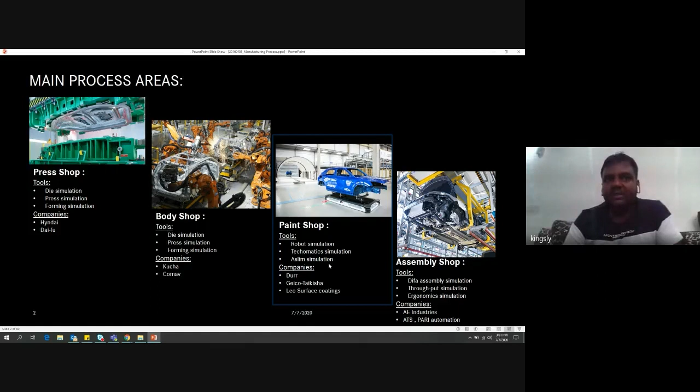So today we will focus more on paint shop. In paint shop we will do the robotic simulation, and also the Tecnomatix simulation, which is nothing but a throughput simulation. Then we'll also do the ASLIM simulation, for the paint properties, like how much thickness we have to give in each part. This kind of simulation we'll do in ASLIM.

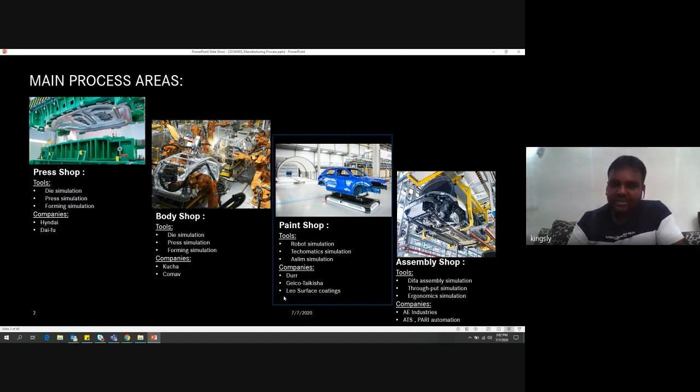So there are 3 major companies in the globe which build the complete paint shop facility for all the OEMs. One is Dürr, this is a German company. Another one is Geico Taikisha, this is an Italian company. Also, there are some other companies. One of them is Leo Surface Coatings, which is an Indian-based company. They also deliver paint shop turnkey projects.

So apart from the main process, there are some auxiliary processes which support the manufacturing process in automobile. The first one is HR admin, sourcing, from the supplier side and how to do the procurement. Then we also have building construction, because we need a building for this facility. Also facilities, then utilities, then logistics for material handling.

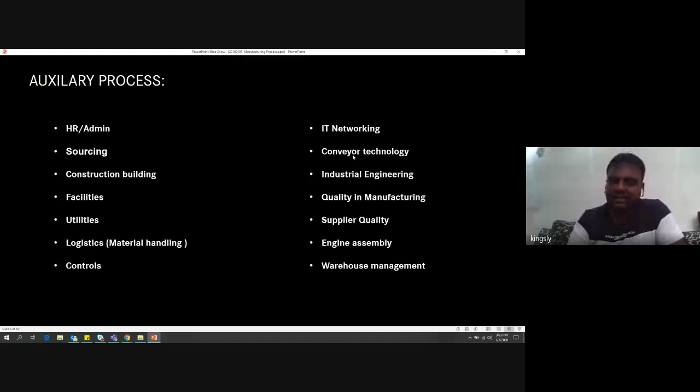Also we'll have a controls department where we collect all the data in one place and trigger where the material has to go into the next step. So controls is also an important auxiliary function. Then we need IT networking. Also we have conveyor technology, which helps move the car from one place to the next process.

Also industrial engineering, then quality in manufacturing, supplier quality. In parallel, we have engine assembly and warehouse management. So these are all the main auxiliary processes which support the main process area. So as we said, today we will discuss more about paint.

So you see cars in different colors on the road. You may have thought about how much the thickness of the paint will be. So before going into the thickness on the car, I will give some examples. Human hair is 50 microns thick, so whenever we talk about thickness, you can easily compare which thickness we are talking about. Then a dust particle is around 10 microns. Cotton fiber will be 20 microns. A smoke particle is 1 micron. So you can compare with a human hair for your assumption.

So whenever we receive the material from the press shop, that material is steel, aluminum or magnesium, depending on the process requirement. This material always comes coated with a zinc layer, because it comes from different places. For corrosion protection, all this material is coated with a zinc layer or coil coat, which will be 4 to 9 microns. So when the car comes into the paint shop, it is already pre-coated with 4 to 9 microns.

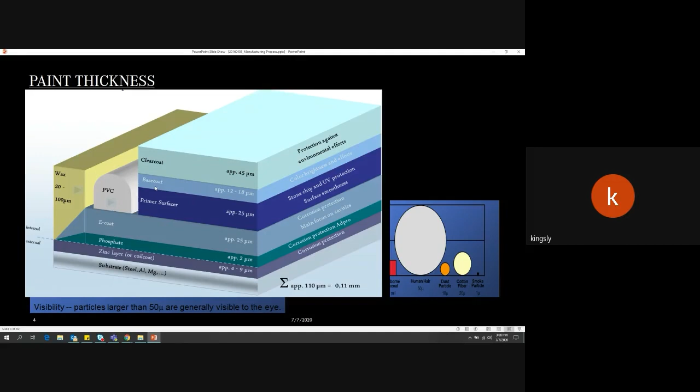Base coat, as I told before, will give the color of the car. For example, if you need a green color car, you will not see it until the primer. The first color will be applied in the base coat. This will decide which color the customer wants. Also, it will give the effects for the car body.

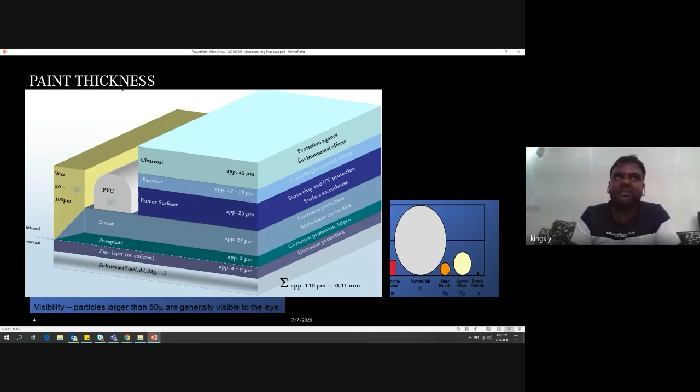Clear coat is protection against environmental effects, which is nothing but a glassy finish. Also, fingerprint protection: if somebody touches the car, you will not see the fingerprint on the car body. So it is for the environmental effects. So this is the paint side.

Also, we do the PVC application. PVC is nothing but polyvinyl chloride. We will see it in detail in the slides below. Also, we do the waxing application.

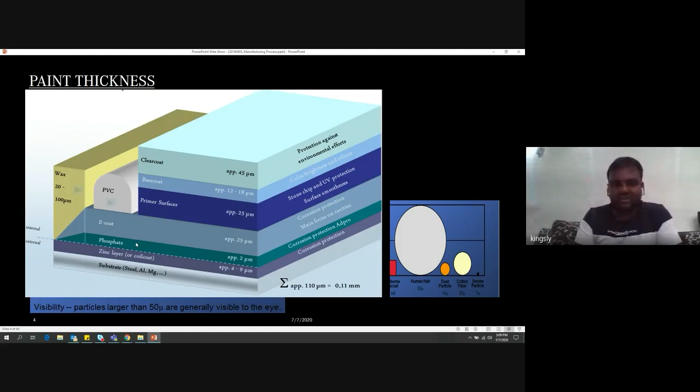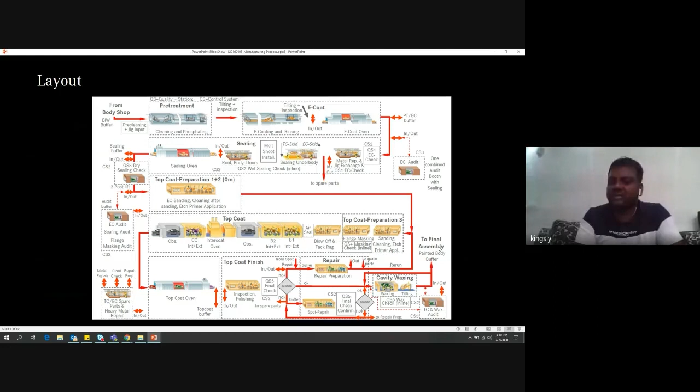After sealing, it will go to the top coat application. After top coat, if there is any repair, then it will go to the repair process. Otherwise, it will go to the cavity waxing process. Then it will go to final assembly to assemble the interior and exterior parts.

So first we will talk about the phosphate coating. What is the phosphate coating? How do we do the process of phosphate coating? For phosphate coating, first we have to clean the complete car body, which is coming from the body shop. Because in the body shop, we may store the cars a little longer, and the bare material should not get corrosion.

Also, to avoid this corrosion, sometimes we apply oil on the car body. So when we come to painting, there should be an oil-free surface. Only then will the paint quality be good. For that, first we need to clean the complete car body. After the cleaning, we have to do the rinsing with activation. Then we do the phosphate coating.

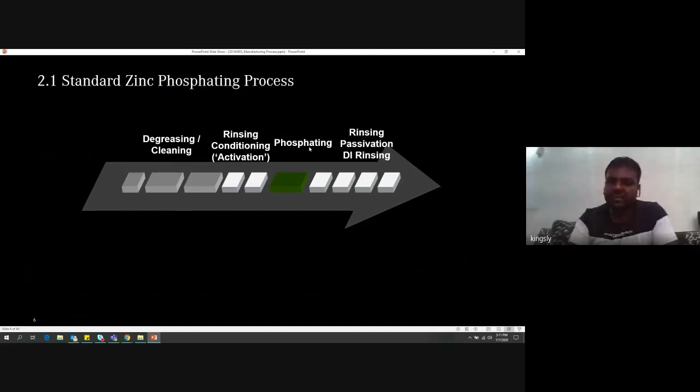After the phosphate coating also, we do the rinsing, because phosphating is nothing but a chemical cleaning process. If the material stays more than the required process time in this phosphate chemical, then the chemical starts etching the metal, which is not good for the e-coat process. That's why after phosphating, we do the rinsing.

So how do we check the surface is cleaned for the e-coat, meaning whether the phosphating is done completely clean or not? If you put water on the surface and there is oil, then the water flows like this. So the cleaning of the car body is not done properly. But when the cleaning is done, we will have a smooth surface.

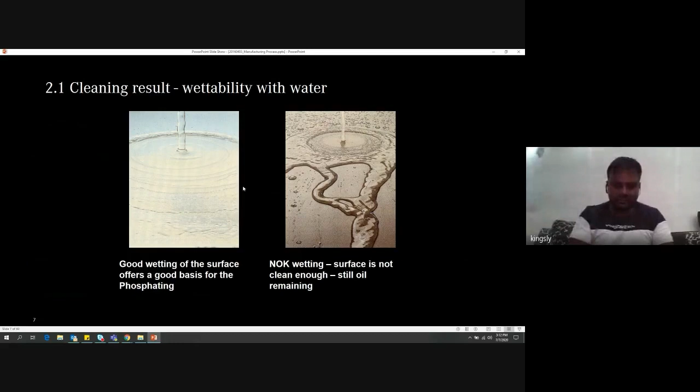So we have a separate laboratory in the factory where we can analyze how much chemical is required for cleaning and what kind of process time we need for this cleaning. Then finally, we should achieve this kind of smooth surface.

So if you check the cleaning of the car body with a microscope, we need to get this kind of activation surface, because this will help the next e-coat, nothing but the primer coat process. If you see these kinds of crystals, then the cleaning or conditioning activity is not done properly.

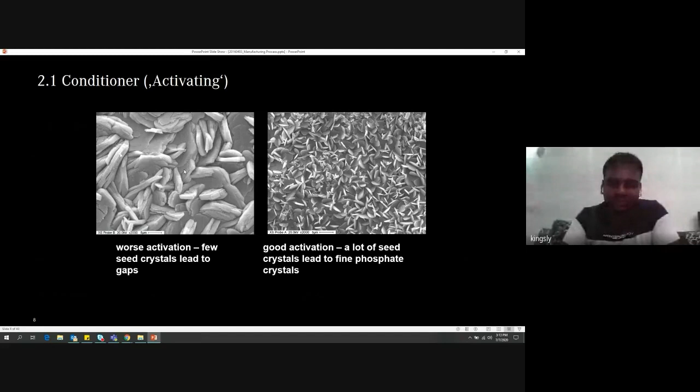For the phosphate tank, basically we use phosphoric acid, then zinc, nickel, manganese, iron, and calcium. Also, phosphate, nitrate, sulfate, and chloride anions. Then for the accelerator, we use NaNO2 and H2O2. So these are all the basic chemicals used for the phosphate coat.

So as I said before, this phosphate coating is 2 microns for the car body, and a human hair is 50 microns. So you can compare how much thickness we are adding to the car body.

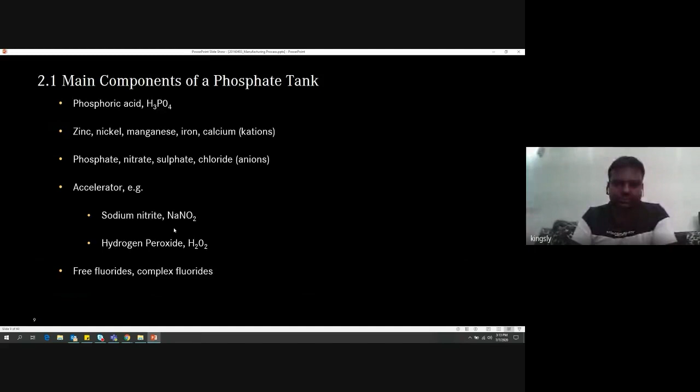So the first one which we spoke about is the phosphate coating. To do this coating, we have some process time. If you see the pictures, when we dip the car body into the process, at 2 seconds it shows this kind of crystal. Then after 15 seconds, this kind of crystal. After 90 seconds. So at 150 seconds, we will achieve the required surface for the e-coat. So the total process time for this process is 150 seconds.

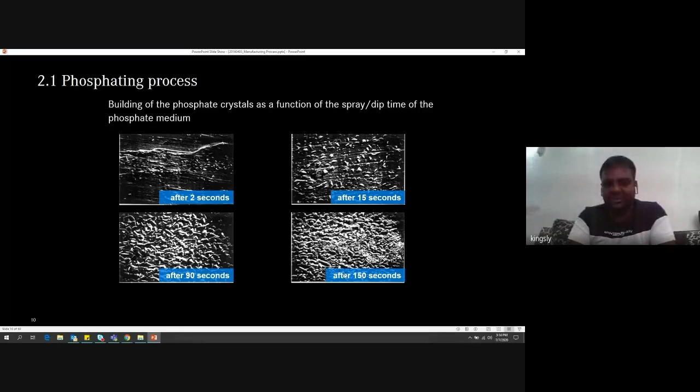The next coating is E-coat. E-coat is the primer. The first primer we will apply on the car body and the cavities. So this is the dip process. If you see the picture, the paint will be in the big tank. Then we will dip the complete car body. So why are we doing this E-coat? E-coat is nothing but an electro coat. First, for corrosion protection, then for inner and outer edge corrosion protection, we do this kind of E-coat.

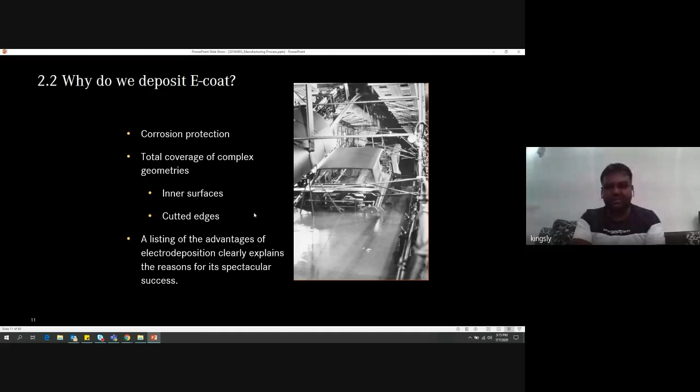So how is the process? The basic science. The E-coat is nothing but a cathodic electrode process where we keep the car body in the plus terminal. Then we have to give the voltage for the paint in the negative terminal. So how will we give this voltage? If you see the next picture, the paint will have the anode cells. Anode cells are the electrochargeable cells which will create a 24 volt negative voltage.

So this is the tank. The tank will be grounded. Then the tank will be filled with E-coat paint. For electroshock purposes, this tank will be coated with fiber so that there will not be any electrical energy transfer from the paint to the outside surface of the tank. So this fiber coating will act as insulation. There will be a full amount of paint in the tank. This paint will be charged with one rectifier. The rectifier will give the voltage, which I told you, 24 volts for the paint.

Then we have a car body. The car body is the metal car body. It's always steel parts where we can do the coating in the E-coat. So this car body will get the positive supply, or vice versa. We can also have the car body be the negative supply and the paint be the positive supply. This depends on the rectifier. We can give this voltage to the car body. So when this car body gets voltage, the paint already has the negative voltage, which we call the anode. Then by the electrocathodic method, all the paint will go and deposit on the car body surface.

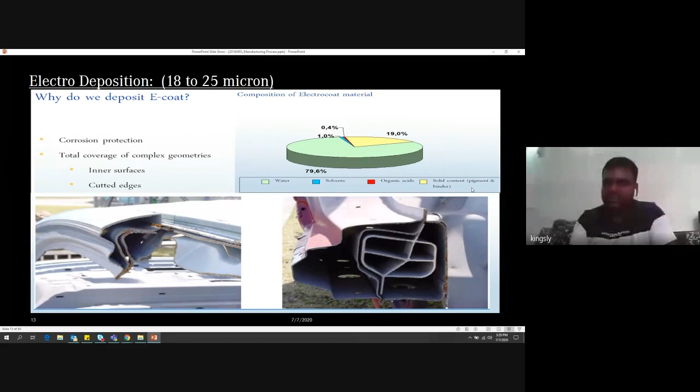Then we have to look at how many seconds we have to keep the car body in the process. But ideally in automobile industries, we'll keep 240 seconds. Then voltage will vary depending upon the production jobs per hour output. If they need more cars in 1 hour, then they keep less time, more voltage, or vice versa.

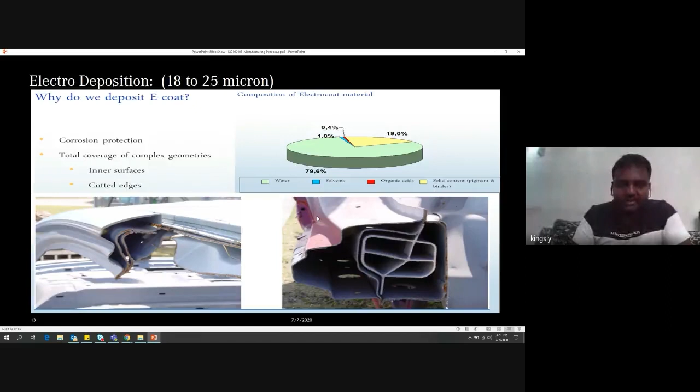Then another important topic for the e-coat process, because whenever we dip the car, there will be air bubbles in the cavities, because we always dip with some angle. I'll just jump to the first picture. You can see we always put the car in some angle. So this angle will be 18 degrees or 30 degrees or 45 degrees. Depending on the length of the tank and the conveyor speed, we can define this angle.

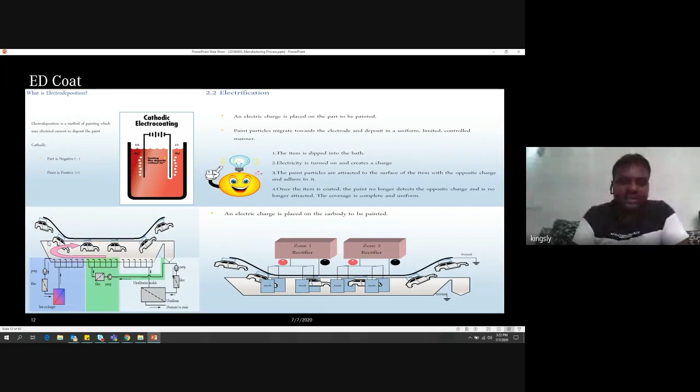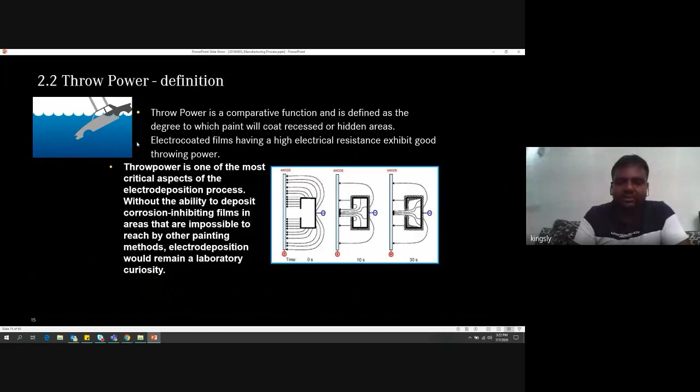So whenever we dip, there will be air bubbles. The air will move inside the cavities. Then if there is air, the liquid paint will not enter. So for that, we have to do some rinsing in the process. So how do we do the rinsing? We have nozzles in the bottom of the tanks. Then we'll give the throw power. By this throw power, we can push the air a little bit. There are also holes available, which we call drain holes. By these drain holes, the air will go out. Then the complete car body will be coated.

So how do we check this throw power? Because we want to know, okay, this is the car body, how much power we have to give, how much circulation we do. Because I also told you that in the e-coat tank we need a laminar flow. So if you give the complete circulation, it will transfer into turbulence, which will not be good for the exterior of the car body.

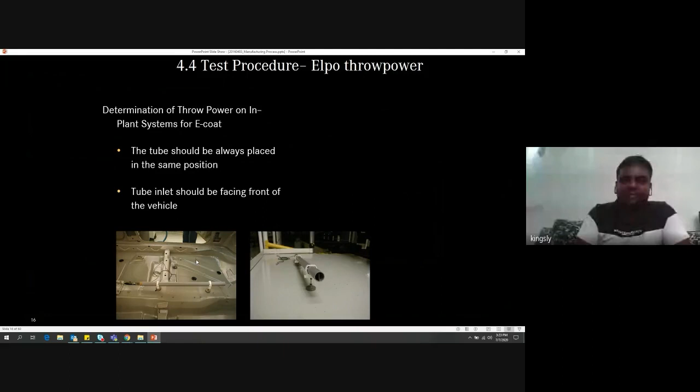So we have a test center. In the test center, we will prepare a pipe. Then we will check how much volume is needed, how much force we have to apply to help the paint achieve this throw power. Then these are all some test methods. For example, when we put 1 bar pressure, how much throw power we are achieving, and by this, how much coating we are getting, so how many microns in thickness.

So basically, this is like a complete car body. We make a sheet of 100 millimeter or 1 meter square. Then we'll put this plate into the tank. Then we will give the circulation and voltage. We will check how many microns we are achieving. For example, here we are achieving 20 micron, in the middle of the plate 19, then the edge of the plate will be 20 micron. So more or less we know it is within tolerance, because for e-coat we need 18 to 20 micron, 20 to 25 micron, so this throw power is okay.

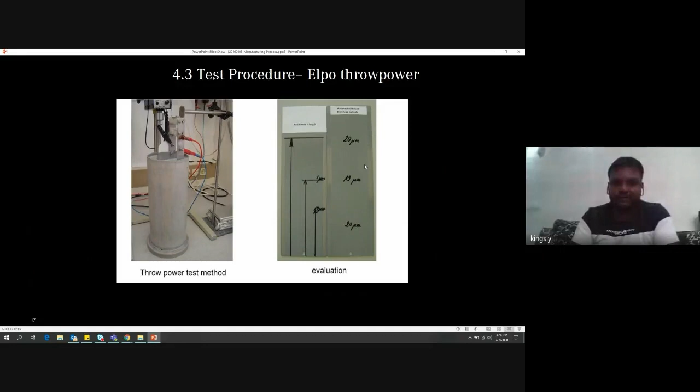Next one is how do we do dosing of this paint? How will we get this e-coat paint? So we will get the paint in two categories. One is the binder, then the pigment. Pigment is nothing but a color, and binder is nothing but a paste which will give the adhesive properties for the paint. Then these two will be mixed with DI water. By circulation, this binder will be mixed with pigment in a uniform way, so that if you dip the car body, when it is coming out, you will see equivalent paint distribution in all the areas.

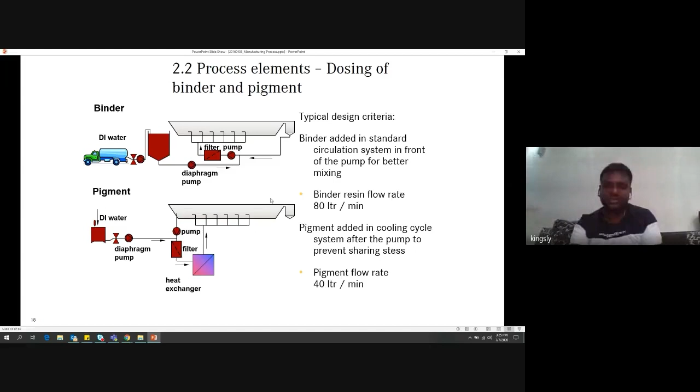The next process for painting is the oven. Whenever you do the painting, any coat, say e-coat or base coat, primer coat, we have to send this car into the oven. So what is the oven? The oven is nothing but a heat chamber, because each paint material depends upon the paint manufacturer's recommendation. Whenever we do the painting, we have to do the polymerization. Why do we have to do polymerization? Because we need around minimum 10 years of life for this paint.

Some OEMs give 30 years, some OEMs give 10 years guarantee for paint corrosion, some OEMs give 3 years. So based on their company policy, they also choose the paint. For example, if they are going with a lower value car model or some commercial model, then they give 3 years of paint corrosion protection for the car. Then they may use low cost paint because it has to withstand 3 years. If you go with a luxury car model, they give 30 years validity. Meaning for 30 years, if there is any corrosion, they will get the guarantee for that corrosion protection.

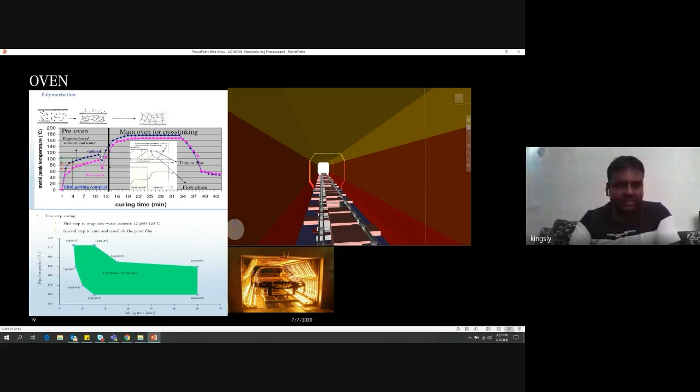So for this, we have to heat up this paint first for 10 minutes at 110 degrees Celsius. Then we have to heat it again from 110 to 180 degrees Celsius. At 180 degrees Celsius, we keep it for 28 minutes in the heat oven. Then we cool down to normal temperature, below 40 degrees. When we do this process, the paint gets polymerized. Polymerized means the crystal is broken for the paint, as you can see here. This gives good adhesion between the metal or steel and the paint material.

One comparison: if you do painting for a house, if the surface is not good, it will come out maybe after 6 months. But house painting uses different material, different process. For automobile, this is very precious because all the material is steel, most of the material is steel. So we have to do proper painting, because painting only will represent the car quality, like shining, and attract the customer. So for E-coat, we have to follow this polymerization.

So whenever we do the polymerization, we also have a quality check. We will check how much the temperature is for the car body. We will not check each car, maybe per shift we will check 1 or 2 cars. Then we will check if the oven is at the correct temperature.

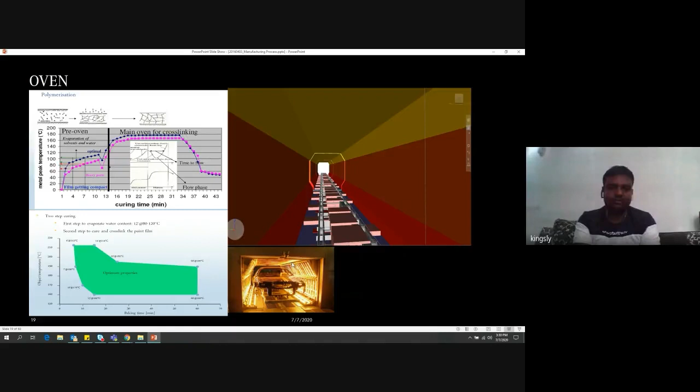Then we have the recirculated air roof center inside. This is the inside of the roof where it is not easy to reach. So we place heat sensors in all these areas, and we run this car body through the complete oven. After the car comes out, this sensor will also have the Datapaq, which is a device that monitors the temperature of the car body as well as the time. So after it comes out, we download and check if the car body paint polymerization is done properly or not. By this, we check the quality of the oven process.

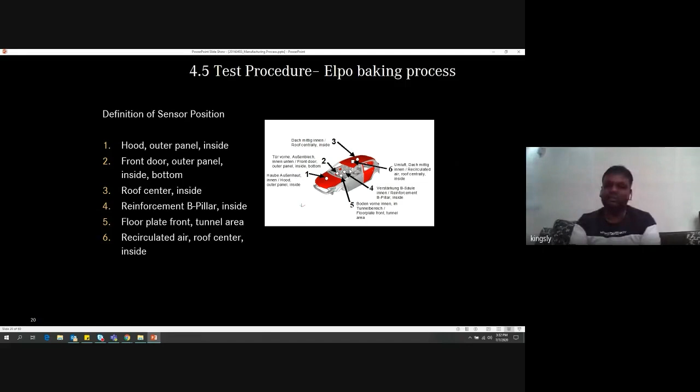So till now we learned what is phosphating for the cleaning of the car body. Then E-coat is the first primer painting. Then for this E-coat, we have to do the polymerization.

Next, we'll go to the test method. One test we saw is how much temperature we gave to the car body, and how the graph looks. By this we can check.

Another test is the adhesion test. If you see this tool, we call it the cross hatch line tool. With this tool, we make a scratch on the car body. If after scratching you can see only the line, then the paint is okay. But if the scratch comes out blurred, meaning it's also removing some surface apart from this tool edge area, then we identify that the coating is not okay, meaning the paint and the steel are not bonded well, not polymerized well.

Then we will go into the test process again with the laboratory. We will check the property of the paint, then the polymerization movement. Also we check the voltage of the car body, which was given during the e-coat process.

Finally, we have to prove and pass this adhesion test. Otherwise the quality of the paint is not okay for the car body.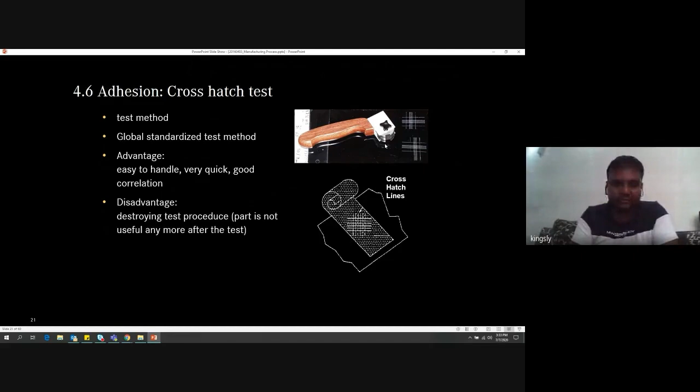So why do we do the sealing? As I told you before, from the press shop we get each part in segments, like the underbody separate, the door separate, the hood separate - everything is separate. In body shop, we do the welding.

In body shop we will not do continuous welding, because when we do continuous welding, this sheet metal gets destroyed - the maximum thickness is 1.2 millimeter and the minimum thickness is 0.6 millimeter. When you do continuous welding for 0.6 millimeter, the shape will change and we won't get the car shape. Also it is a difficult and time consuming process.

So for that, what we do in body shop is stitch welding with particular intervals based on simulation. Then in sealer, we apply a complete sealing material. Sealing material is called polyvinyl chloride material, and this is sealed in all the joints for the car body.

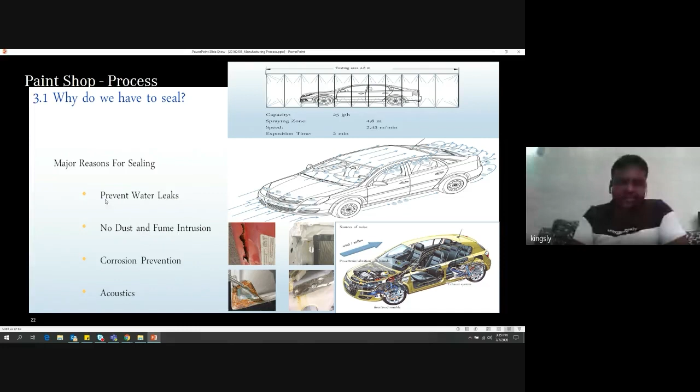Also, if water comes in, it starts to cause corrosion. Basically, we do this entire paint shop process to avoid corrosion. So this painting and sealing is all for corrosion resistance. We have to prevent water leaks - that's why we are doing this sealing.

Then the second reason is no dust and fume intrusion. When you drive outside, we also have the engine compartment, so there should not be any dust or fume coming inside, which would not be comfortable for the passenger. Also, as I said, it's for corrosion prevention. Also, the sealing helps with acoustics.

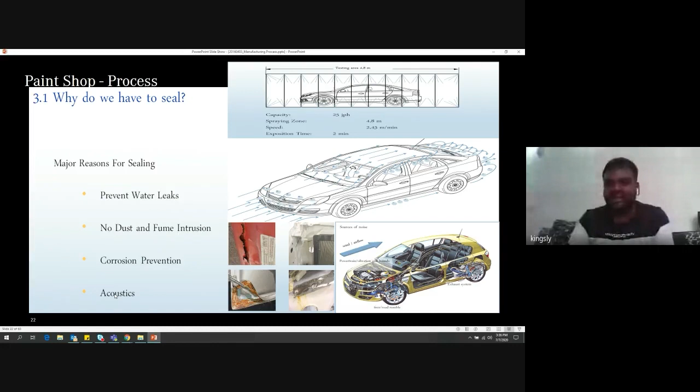Because whenever we prepare a car, we also do the aerodynamic simulation. For that, we assume this is one body - it is not like separate sections where you have a gap where air can access. So this also helps.

If you see this picture, the corrosion - if you don't do the sealing, after 6 months it starts to corrode like this. Then because of the corrosion, the joints also come out. It also helps for the airflow where we can drive the car faster.

Then how do we test the sealing process? What we do after the sealing and after assembly is keep the car in the shower tester. Shower tester is nothing but a spray of water where we keep the car.

We run this car for 4.8 meters at 2.45 meters per minute. Then the time for exposure is 2 minutes. When it comes out, we check inside the car if there is any leakage or not.

So by this, we will ensure that the sealing process is okay.

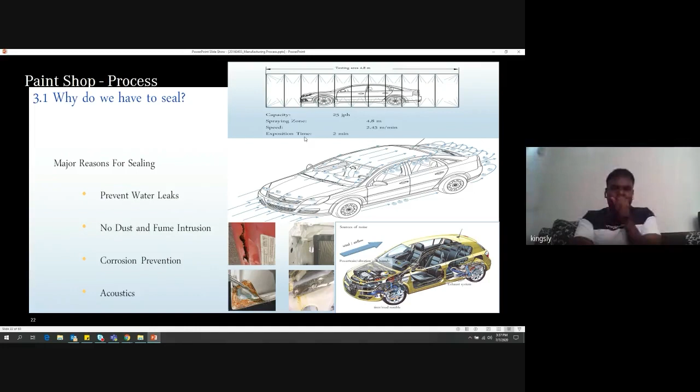So this we already saw. The main purpose is to close all the seams, nothing but the joints, from water and fume noise.

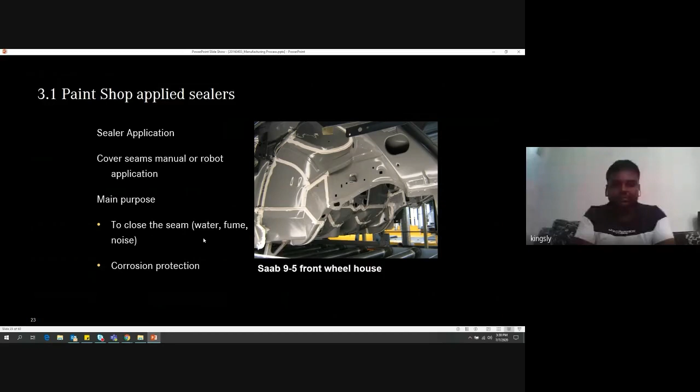Next one is the primer coat process. Primer coat will be done by 25 micron. Before we saw the human hair is 50 micron, so this will be half the size of the human hair, which will be the primer coat.

So same, if you don't do the primer, if some stones come into the car, wherever the stones chip, then the paint will be removed. Mainly for the primer coat, we do it to improve the chipping resistance when we drive the car.

This will also help for UV ray prevention, and also will help for coverage of the e-coat, because e-coat covers the complete car interior and exterior. Then this will also help for smooth operation of the base coat.

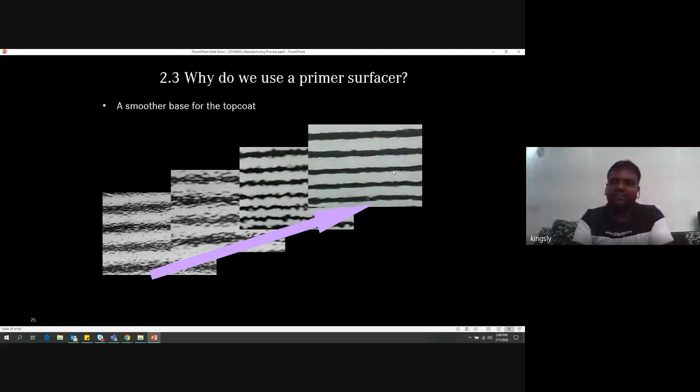So this is the crystal picture with microscope for the primer surfacer. We need to get this kind of surface with clear, smooth lines, so that the surface is good and helpful for the next coating.

Next is the base coat, which will apply for 18 micron. Mainly the base coat purpose is to reduce UV light, also the heat. When we park the car outside with 45 or 50-degree temperature, it won't destroy the color. So for this, we do the base coat.

Also for moisture, if we keep the car in rain, or when we do the cleaning, it won't destroy the color shade. So this supports color and design aspects, also brightness and marketing. Marketing why? Because this is the first coat which will give the color.

The previous coat, e-coat and phosphating, is colorless -- well, I would not say colorless, it's like a primer color. But the base coat will give the first surface for the color.

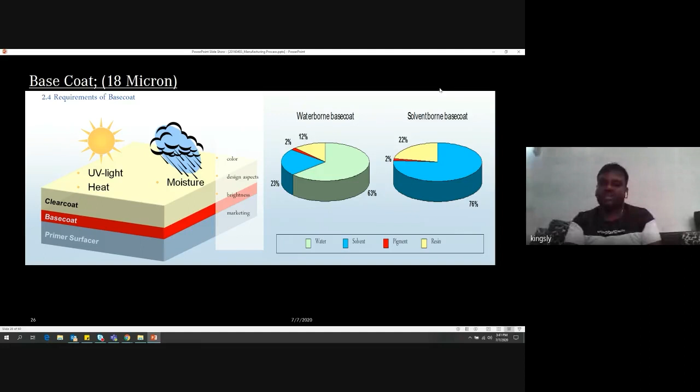So the base coat depends on the material. We have a water-based base coat and a solvent-based base coat. Some countries like European ones, they already banned the solvent-based, because when we do the base coat we also do the polymerization as we saw before.

So with solvent-based, when we do the polymerization, the paint releases some hazards which will be harmful for humans. That's why some countries stopped the solvent-based coat and use the water-based coat instead.

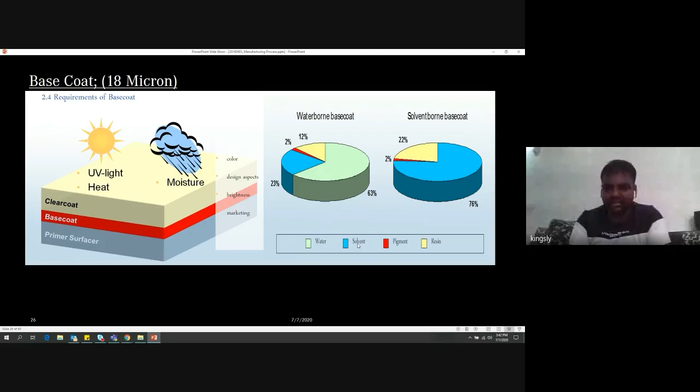So how do we do the coating for primer, base and clear coat? We saw before with e-coat, we have a tank, we dip the car and take it out. Primer, base coat and clear coat basically do the external surface, also the internal surface -- internal surface mainly the edges where we don't have any trim part.

This will be a completely robotic application. Some OEMs, if they are running low job production, may do the internal application manually with an operator, but nowadays most OEMs do it with robotics. So we'll have robotics for each station -- we'll have 4 robotics which will divide the surface area for painting.

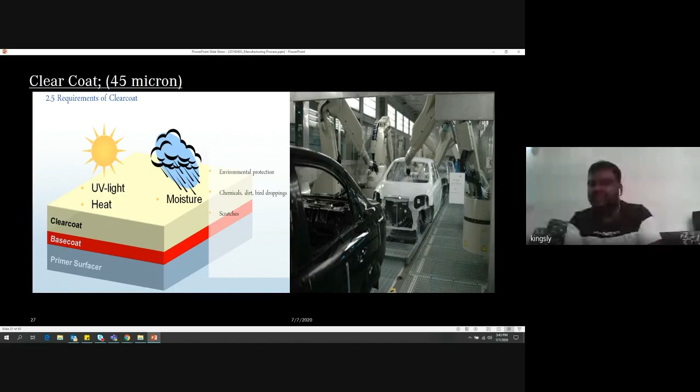Then also we'll have a handling robot. The handling robot will help open the hood, open the door, open the deck lid -- the rear one -- to help this robot do the internal painting.

So this clear coat will be for environmental protection, meaning to avoid dust and fingerprints -- as soon as you touch the car body, you will not see fingerprints on it. It will also help against chemical dirt and bird droppings, because whenever there's a dropping, it's easy to clean and won't stick to the car body.

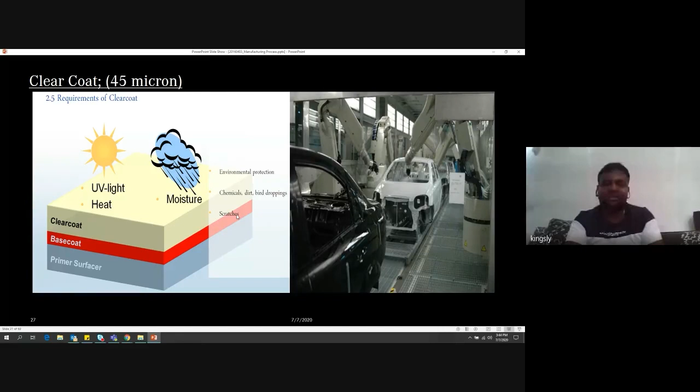It also helps with scratches. Whenever we run the car off-road with trees in between, any minor scratches won't be visible. Clear coat protects, and also helps against UV light, heat and moisture.

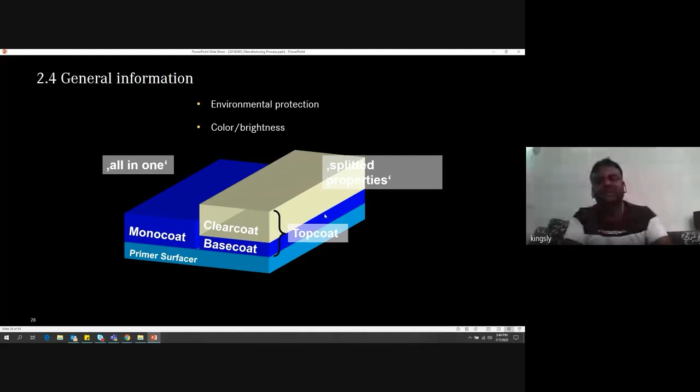So what we taught, it's like a general information. So the color which we give for color and brightness and the environmental effect. So basically this clear and base coat will go together. We call it as a top coat. Why we are telling like this is, as I said before, each painting we have to go with the oven, but with current technology, we have a technology called IP2 process where we can do base coat and clear coat together. We don't need an oven.

So initially, we have e-coat, primer coat, base coat, and clear coat. Now, base coat and clear coat is combined. So we'll have a primer surface, then base coat and clear coat together as a top coat surface.

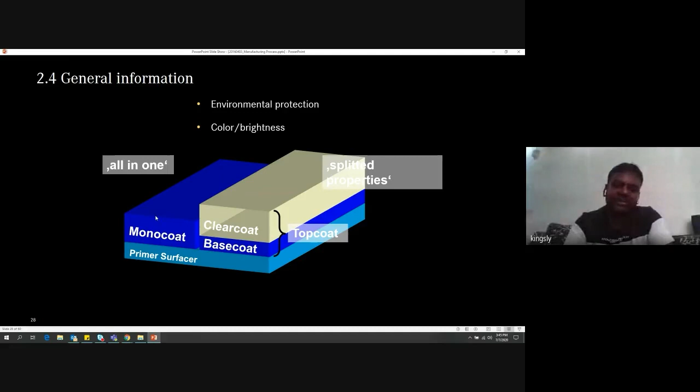Also, for commercial vehicles like a truck and van, they will not do this kind of expensive coating. They will do the monocoat, which is all basic primer, base, and clear coat in one coat. So we will also call it as a powder coat, or also call it as a monocoat. So this is only for a commercial vehicle. But for luxury vehicle, we do this coat.

Okay, next, how do we do the test? After all it's done, the cross hatch test. I showed the tool before. So we will do the scratching of the car. After it's coming out of the coat, we will see how is the property of this scratching. Whether we are removing only the scratch surface or we are also removing the extra surface surrounding the scratch. So for example, if we are removing the surrounding of the scratch, then the test is not okay.

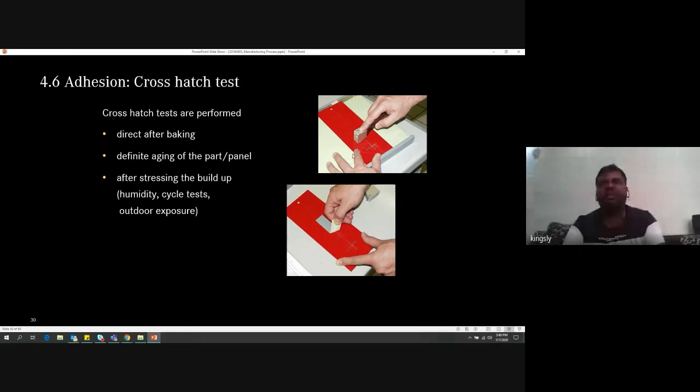So you can also see here, we'll also do it with this tape, this adhesive tape. Then also we can check how much is the scratch or how much the paint is coming out. So by this we can also check whether this is the problem of the coating or it's a problem of the baking, meaning problem of the oven, or it's not polymerized well. So we can also check with this scratch test.

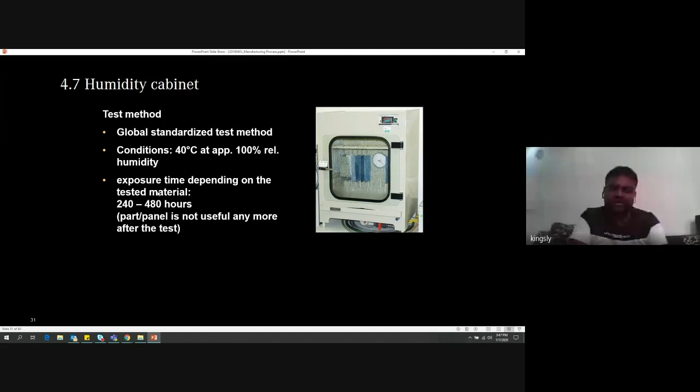So next one is the humidity cabinet. This is for the humidity test. What we do, the car body parts, the panel, we will keep it at 40-degree temperature with 100% relative humidity. Then we'll keep this panel for 240 to 480 hours. So then after we take out this panel, we will do the similar scratch test. Then we will know how the quality of the paint bonded with the car body.

Then also the car will be delivered to the sea coast also. So this test is also a must. So what we do, we have a salt spray chamber. So in this chamber, we'll add salt based on the climatic condition. Then we'll keep this panel for 144 to 240 hours. Then we'll take out this panel, we'll do the similar scratch test. Then we'll know whether this paint and the steel is okay for the salt spray test or not.

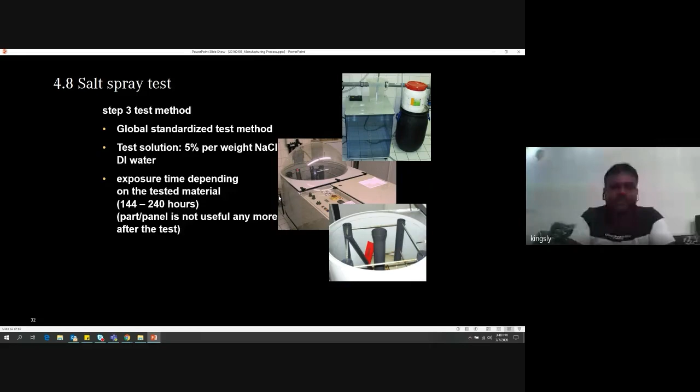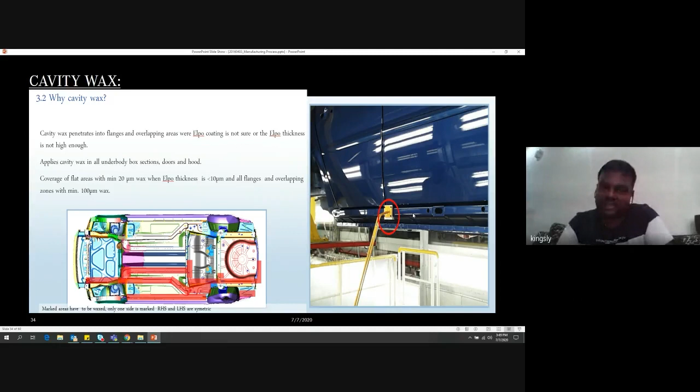This is the last process, the cavity wax, process-wise. So what we do, we also have done the e-coat paint to have the protection for the cavities. But sometimes inside the cavities, we cannot see whether it is all over coated or still some air bubbles are left, because we also do the simulation, we also do the destructive test, but still there will be a plus or minus 10% deviation from car to car.

So to avoid this, what we do, we take the wax material, then with 20 micron, we will spray along this cavity. So if you see the car body, it is the bottom view. So where we have a car body, we will spray this car body with wax. So whenever we do the cleaning of the car, or when the car is in rain, if some water goes inside, then it won't have a direct contact with the interior metal part, so that we can have corrosion protection.

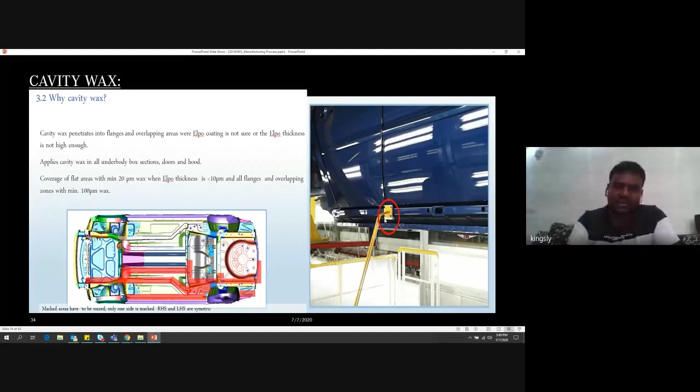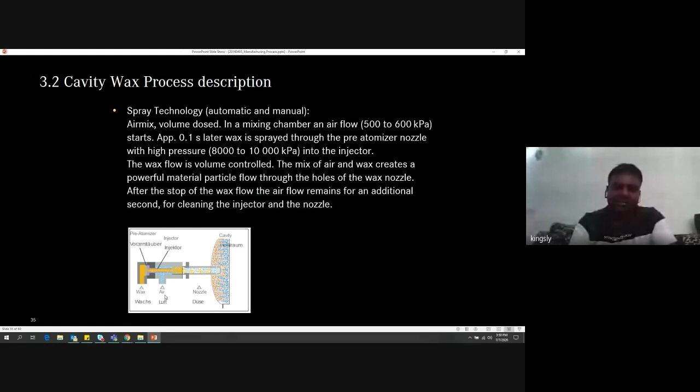So how we do the wax: we'll have a nozzle, then we'll have holes in the car body in the cavity areas. One side will have wax, another side will send air. With the help of the injector, air and wax will mix, then we'll spray it onto the car body. Then we need a uniform spray. For this, we can adjust the injector to have proper mixing of air and wax material.

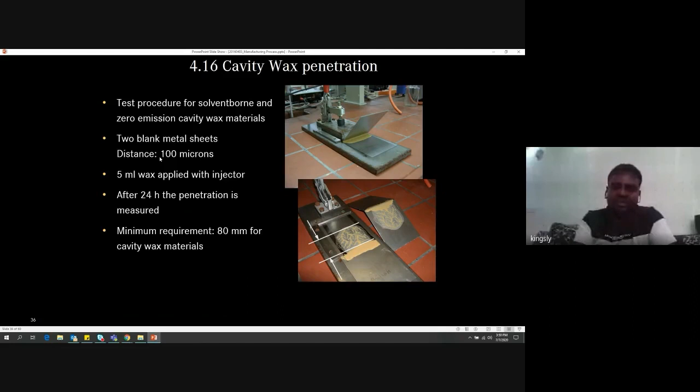Then for wax also we'll do the penetration test. After applying the wax on two panels, we can see how much it has expanded. If you apply 5 milliliters of wax, it should cross 80 millimeters. This will help to identify how much wax material we need.

Another topic is that in the car body, we will not have many holes in the underbody. We'll have some interval. So how many holes do we need? This also depends on the wax material. Whenever we get a wax material from a supplier, we will check how much distance it travels. Usually, in the vertical direction it should travel 250 millimeters. Then we assume this material is okay, and we can apply it to the car body.

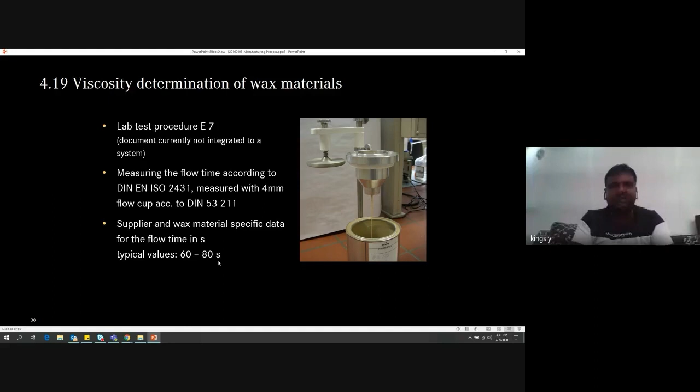Also, the viscosity of the material is important, because when we do the injecting, it should flow. We have a DIN standard for the material, which we also follow. Ideally, the viscosity required is 60 to 80 seconds. Then it is a good viscosity for the material.

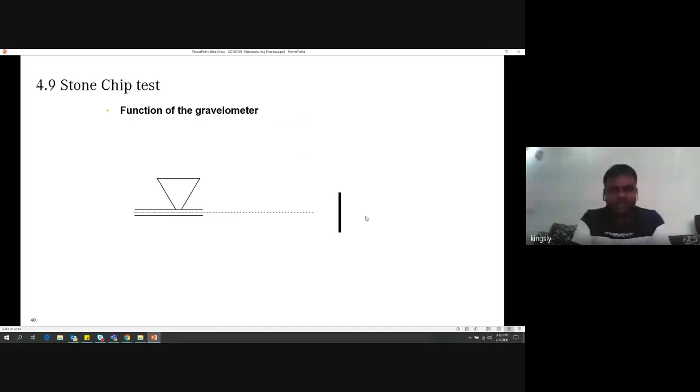The next test is the stone chip test, which we do before we go into the paint shop process or whenever we change the paint material. We'll have a 23 degree to minus 30 degree test temperature. Then we'll take the panel with stones, and we'll spray the stones onto the coated material.

Then we'll see how much the paint chips out, whether the paint is chipping out broadly or only where the stones hit. Then how is the quality? We spray this with 4.5 bar pneumatic compressed air. By this, we also check the quality of the paint.

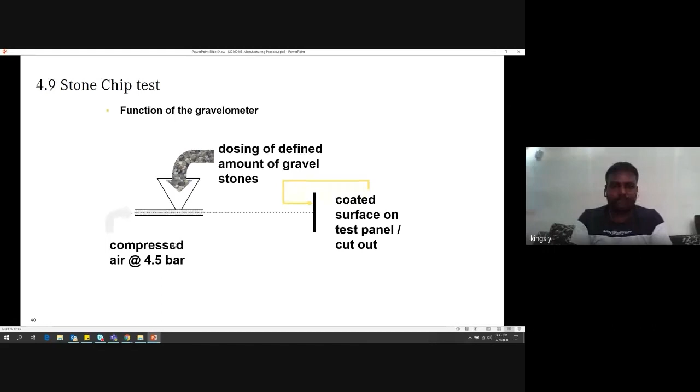If the stone chip quality is not good, we analyze which part of the car has poor stone chip quality. Then we add another coat in those areas, because it is a special process. On some cars, the rocker panel area, below the door panel, is in close contact with the tire. When we drive fast, stones from the tire hit the panel. If after the test we identify this area is unacceptable, because water comes into the chipped area, it will cause corrosion.

Then we'll take measures. Either we'll apply another coat in those areas, like a stone chip coat, or some OEMs cover it with a plastic guard. When they use the plastic guard, it is also for styling, and also for stone chip protection. So this is the evaluation rating for stone chips.

Next, we'll do the weather test. The weather test is based on the climate area. We keep the panel, and based on the area, we create a similar weather inside with air, humidity, and temperature. Then we keep this panel for 2000 hours, for example. Then we check whether this test is okay.

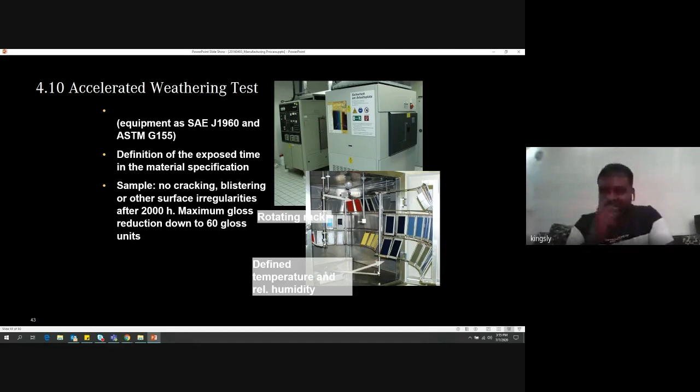Basically, we do the test when we have a new paint material or new colors, or a new metal on the car body, like steel, or we change to stainless steel or aluminum. Whenever we have these changes, we'll do this kind of weather test.

The last important part is gloss measurement. Even though we maintain the process in the paint shop, the e-coat, primer coat, and clear coat, this is only done for the metallic parts of the car body. When the car comes out of the factory, it will also have plastic parts, like the front bumper and rear bumper, and also what we call a stone chip bar. All these are plastic parts. The color of these plastic parts and the car body color should always match.

Same when you go into the interior of the car, we'll have trim parts, seats. These trim parts are plastic. Also the cockpit is plastic. This has to match with the interior color of the car. Otherwise, it doesn't look good.

So after we finish all these tests for the paint material, we also go with the gloss measurements. Gloss measurements we will do for the car body as well as for the plastic parts. Both should match. Otherwise, when the car comes out of the plant, if you order a black car, the black car steel and the black bumper look different. There will be different shades, which is not acceptable. So we have to ensure that the steel car body and the plastic part have the same gloss measurement.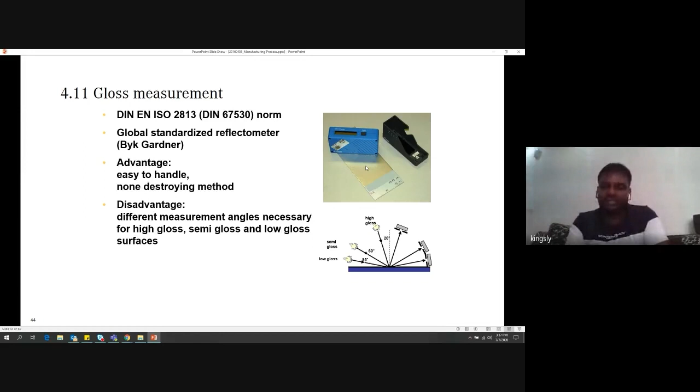When it reflects with orange, then we say this is a fault from the process. But whenever it reflects with yellow and blue, this can be managed by the plastic and steel part combination. So this is like a high gloss surface. Usually we do this test with a 20-degree optic with 85 gloss units. This we call high gloss.

If the high gloss is on the car body metal area and the same is in the plastic parts, then we are okay. Same for semi gloss, we measure with a 60-degree optic, with 50 gloss units. For example, if the car body is high gloss and the plastic parts are semi gloss, then customers can easily identify the car wasn't prepared well. It looks like two different colors. So this gloss measurement should always be the same for plastic and steel parts. After our individual tests, we will also check this parameter.

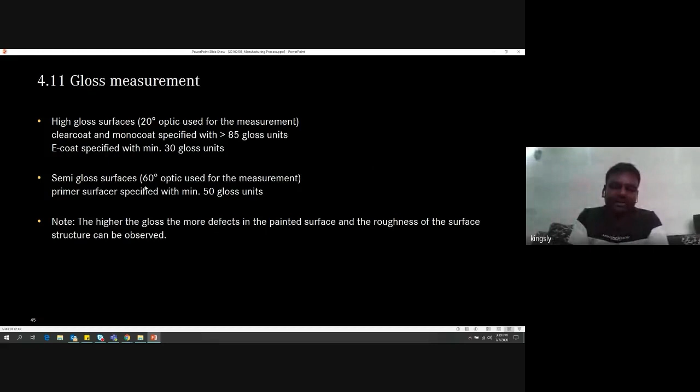Where is the mistake? Whether the mistake is in the car or in the plastic parts. If the mistake is in the plastic parts, we will communicate to the plastic manufacturer. They have to adjust their process because the color measurement is not matching. If it is in steel, then we will do the adjustment in our paint shop process. Mainly this is adjusted in the base coat, because base coat is the first area where we get the color for the car. There we check the robot rotation, speed of the turbine, how fast we are painting. By this we can adjust the gloss measurement.

The next one is the orange peel, because sometimes with a black car or white car, if you look from some distance, you may observe a yellow shade. This is also one of the defects. If we see this kind of yellow shade, then the car is not quality painted. You will not see the yellow shade on the complete car body. Sometimes you see it on the roof, sometimes on the door. If you see this yellow, it shows the quality is not okay.

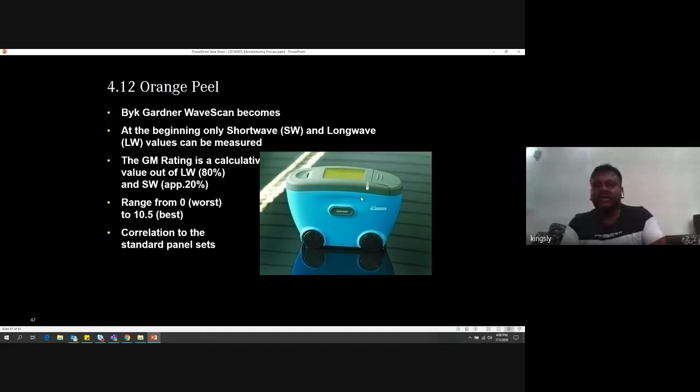This is a machine where we can measure this yellow shade, because when the car is prepared inside the paint shop, we only have artificial lighting. We don't have natural light, so we cannot see it. So we do the measurement with this tool. Then per shift, one car or two cars, depending on the volume, we also take outside into the sunlight. We check in cloudy conditions, pure sun, and sunset. In all these situations we do this kind of test.

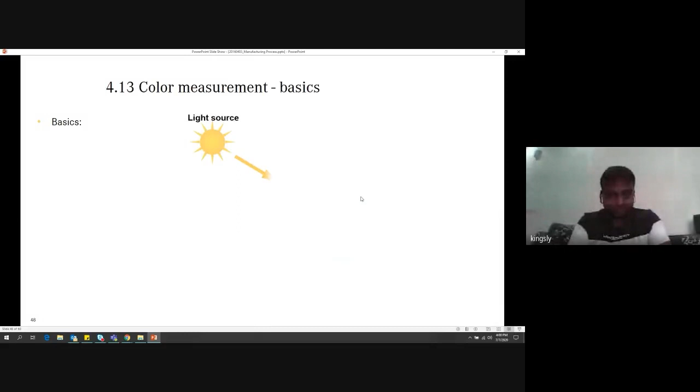So this is an example of how we can check this orange peel. Basically this is the observer. We see the car at an angle, with the sun on the opposite side. It still should not give this kind of orange. If it's the complete car, then okay, but usually it won't be, because we have plastic parts and steel parts. If there is a difference in the basics, then we have to do this kind of test.

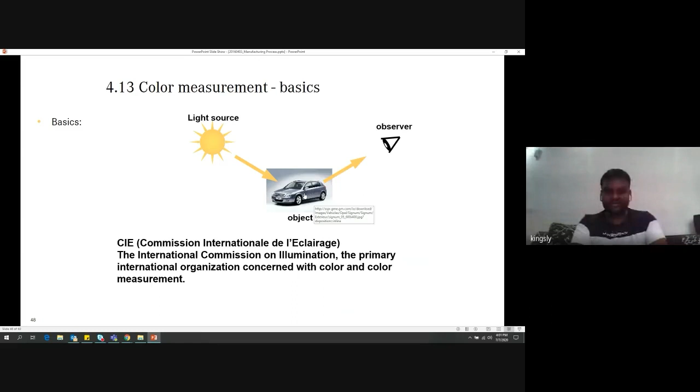So even though we prepare so many tests, we have some criteria that all companies follow globally. So we have to follow this daylight D65 one, then also the incandescent with A, then fluorescent light. So this is the kind of lux which we have to consider while preparing the paint, while preparing the car quality.

Next one is the observer color measurement. This we also do, because from person to person the observer will change. So how we look at the car: one is we have to look at the car at 2 degrees, and another one is the 10-degree observer. These all derive from simulation, because as soon as the car design is finished and a new color is developed, we'll do this kind of simulation: when we check at this angle, how the car looks.

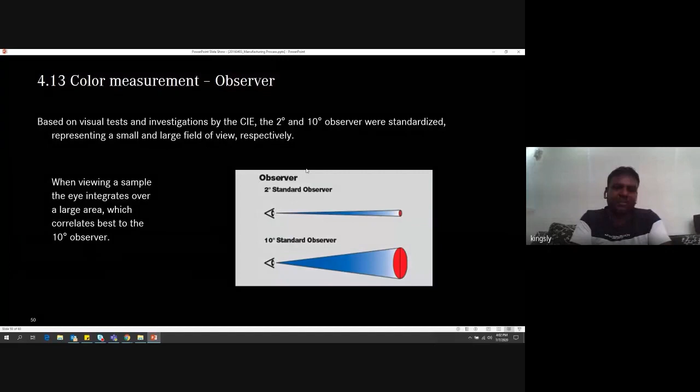So all this lighting, all these angles will be simulated in software. We call this rendering. By this, we do this kind of measurement. After manufacturing the car, we also do this test and compare it with the simulation results. So this is also one of the criteria where we work with the light source, observer, and the object. These are the common color documents used for the test, to decide which new color we can launch in the market.

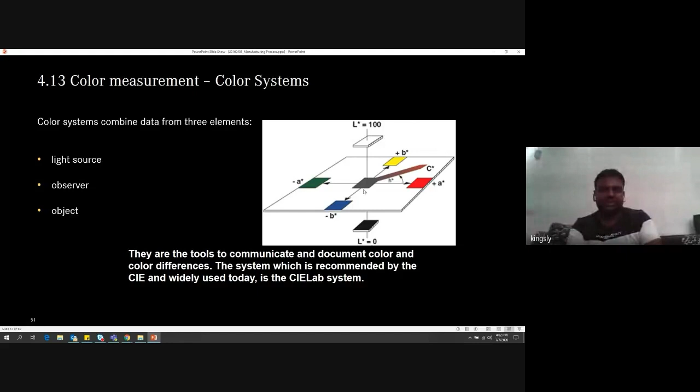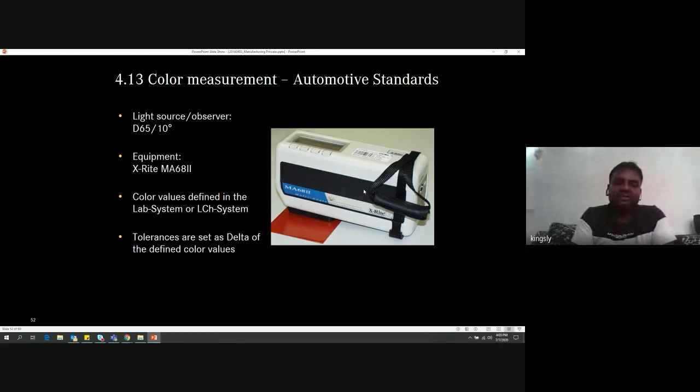So this is the standard equipment which gives the color measurement, including the observer, the paint material, all these areas included. Then we can also define tolerance on this measurement. So when we measure the color, we can also check whether it is matching with the standard or not.

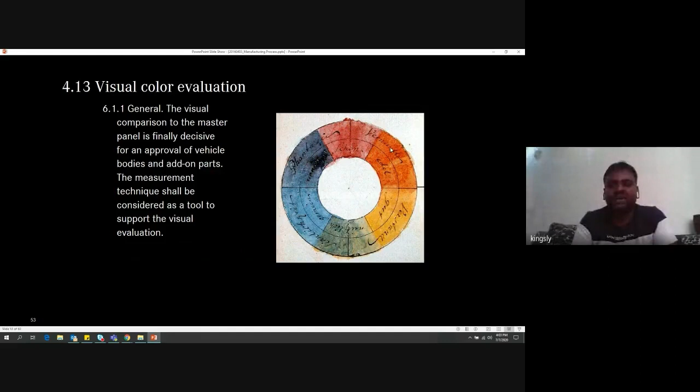Then this is the visual color evaluation. This we also do part by part when we launch a new color: how it will differ based on the process, based on the color. For example, if you have a dual color in one car, when we mix those areas, how it will look. So this kind of evaluation we also do.

Then we also do the paint thickness, and after that the hardness. We saw in the beginning how much the thickness is for each coat. Then after all the process, we also know the thickness for the complete car. Usually the complete car thickness is 110 to 140 micron. We do this thickness measurement in different areas like the door, the roof, close to the bumper plastic parts, close to the mirror parts.

Because this thickness is important. If the thickness is low, then there is no guarantee that it won't get corroded. If the thickness is okay, we give the guarantee that this paint will withstand for 10 years. Then hardness is also an important one, because if the hardness is not good, the paint gets cracks.

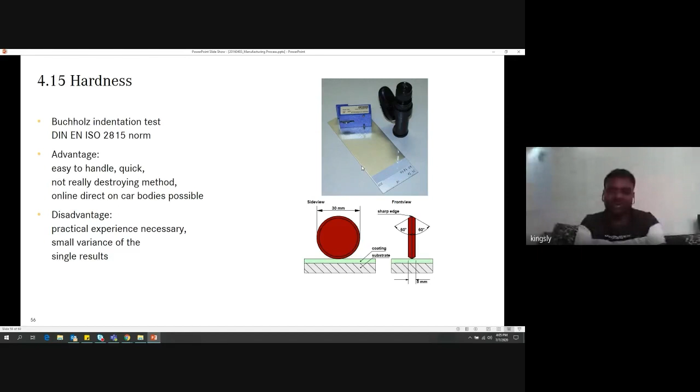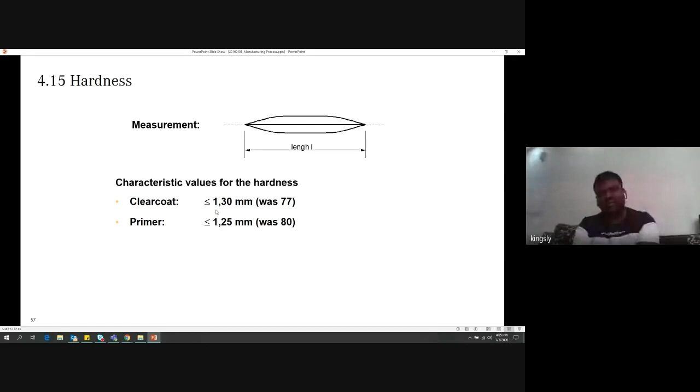So after doing all these tests, we also do the hardness test. For this test we also have ISO standard norms. Based on this test, we'll know this paint won't get cracked after 3 years, after 4 years, and it will have the flexibility to have good adhesion with the steel parts. Basically this is done with the clear coat. The hardness test is done with 1.30 millimeter, and for primer with 1.25 millimeter.

Then we also do the zero emission test for the wax area, because wax material is flammable. Since we apply this for corrosion protection, after applying it we also check the property: it should not catch flame. Based on that, this wax material will be added with binders. Then when we spray this wax, it does not flow around. So this should not be in the exposed area.